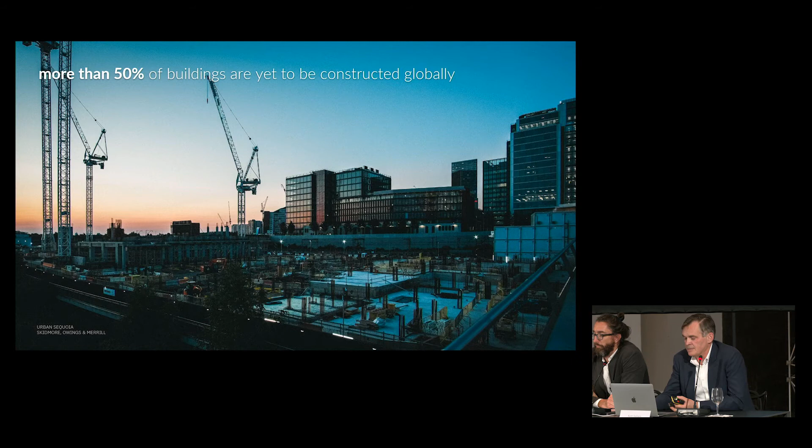So the question is that if we could reimagine our cities in some fashion, and treat them as a series of interconnected ecosystems, where our cities could act more like forests, and help our cities purify, heal, and regenerate, where urban forests could create a new carbon economy, offering a new resource and resilient growth to our planet.

Although a lot of people in the audience might be wondering, how do their organizations even meet the current energy targets? The built environment must do much more than our current ambitions that we're seeing in changing codes and different city aspirations. We can no longer be talking about how we can achieve net zero. All of the statistics illustrate that we're just not going to be able to get there. This is sadly proving to be a clear fact.

We need to be getting our buildings to be carbon negative if we want to make a chance to make any of these changes and the planet be a better place for our future generations.

If we could think more of how an individual building might respond like a tree, where we're able to absorb carbon from the atmosphere rather than emitting it, if we could better leverage our existing technologies or emerging solutions that are out there, could we find a way that we could have a future where our cities are populated with these urban sequoias?

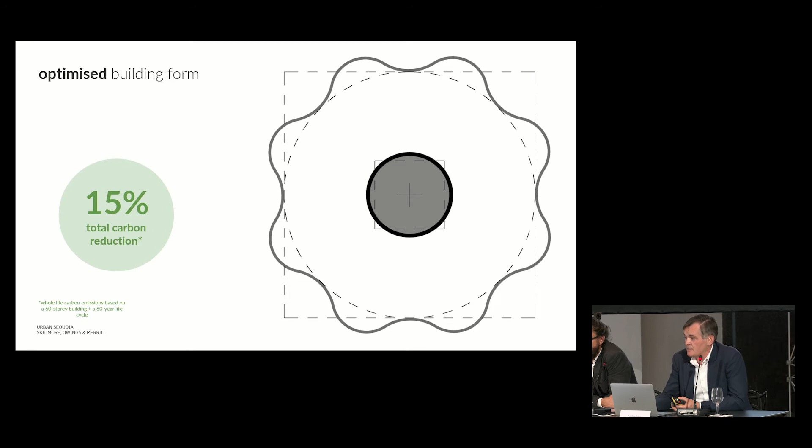Also, by something that's been around since the 1950s, by taking 85% of our building and making it either prefabricated or in modular elements, we could achieve clearly better efficiencies, reduction of waste, and we could limit the movement of both people and goods. This will ultimately allow for less pollution in our cities.

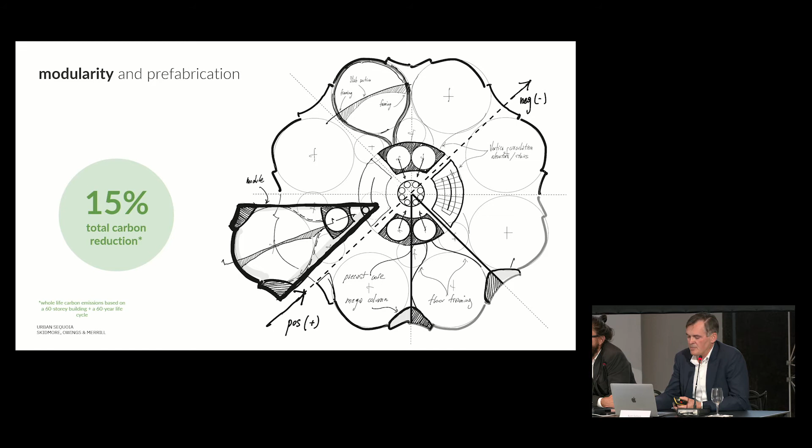And through these very achievable targets, we would again be able to reduce a further 15% of carbon in our high-rise buildings. And if we look at integrated building systems that are both passive and active, the tall building of 60 stories could have up to 30% carbon reductions.

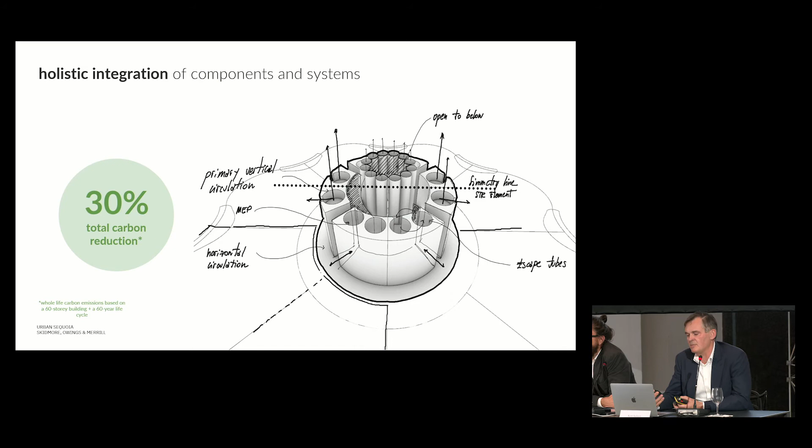That every country in the world that has access to sand, water, and algae would be able to take this and be able, in some of the fastest growing cities and the poorest cities, to make their own building materials on site, and the material could be sequestering carbon. This means we could be delivering solutions that are affordable for everyone and everywhere.

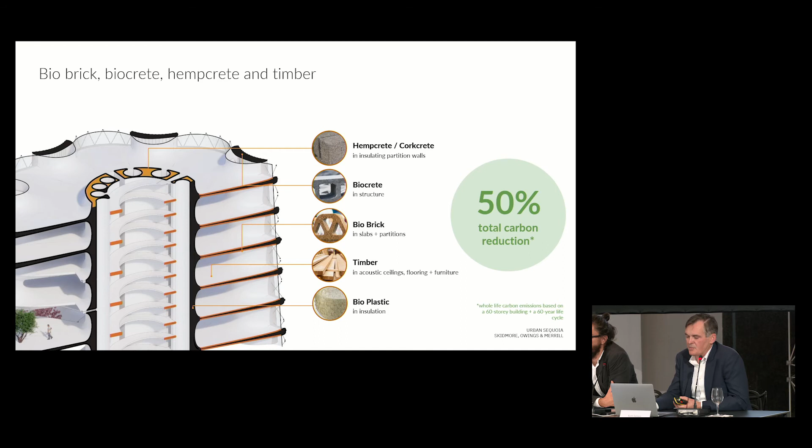Over the last 70 years, we have predominantly relied on only concrete and steel, two of the biggest abusers of embodied carbon. We're finally seeing significant changes in reducing the amount of embodied energy from both steel and concrete. But we really need to look at alternative materials that offer sustainable solutions, such as timber, biobrick, or biocomposites, that can further reduce a building's carbon emissions by another 50%.

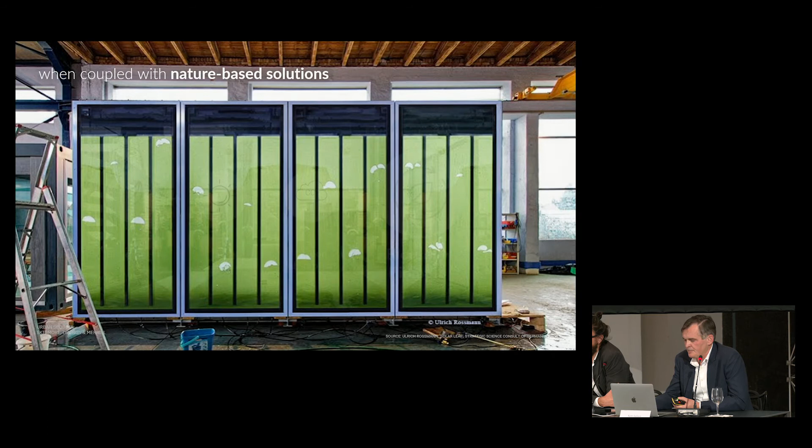When coupled with nature-based solutions, such as algae offerings, this can deliver carbon-negative buildings at scale. This is an algae facade — algae is currently being explored as a source of energy, and its application is already being tested in building components. When algae is incorporated into a building, it can generate energy for its operations and produce biomass as a by-product, reducing whole life carbon emissions by around 25%.

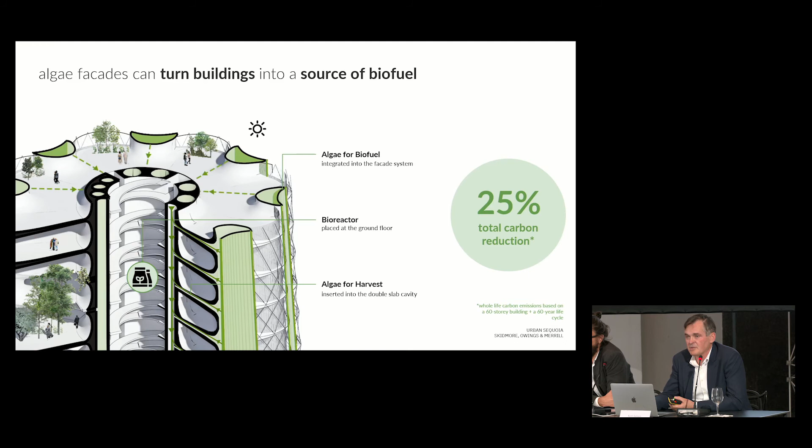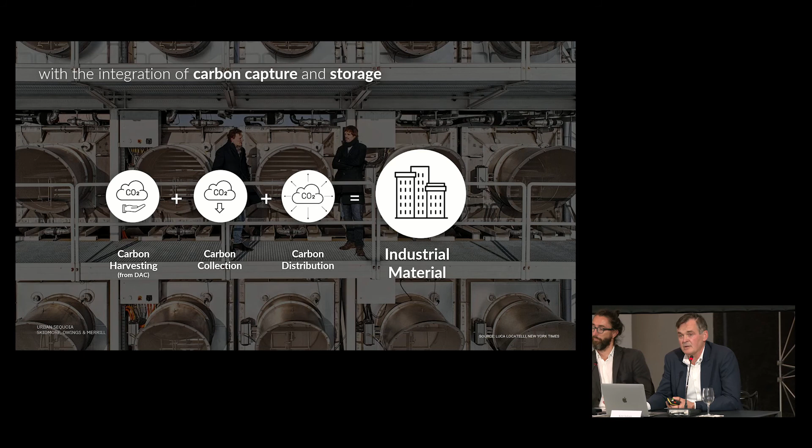When solutions offered through advancements in material science and nature-based sources are combined with technologies from beyond our sector, such as emerging carbon capture technologies currently used in industrial processes, we can bring these to our sector and dramatically accelerate decarbonization of the building industry. With the integration of carbon capture and storage into our buildings, we can achieve another potential reduction in carbon by around 75% in a single tall building.

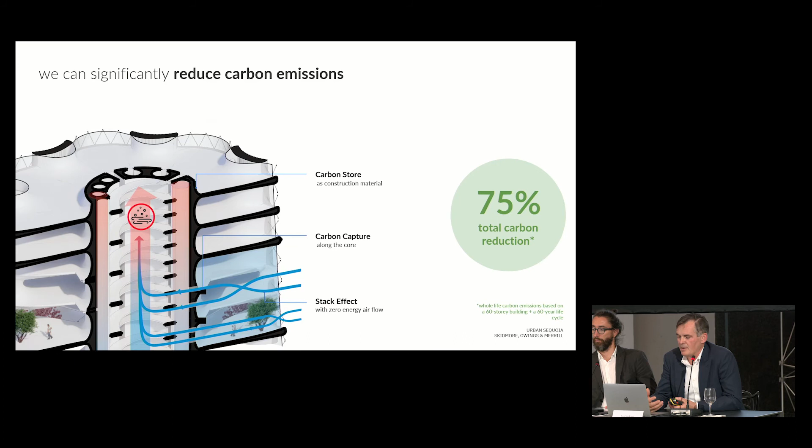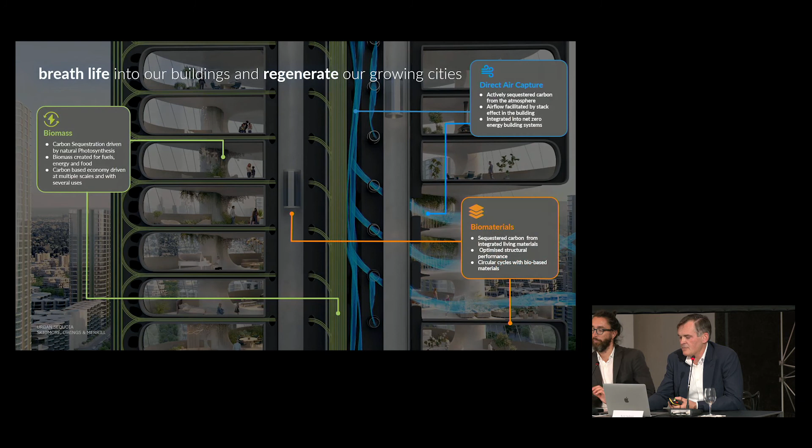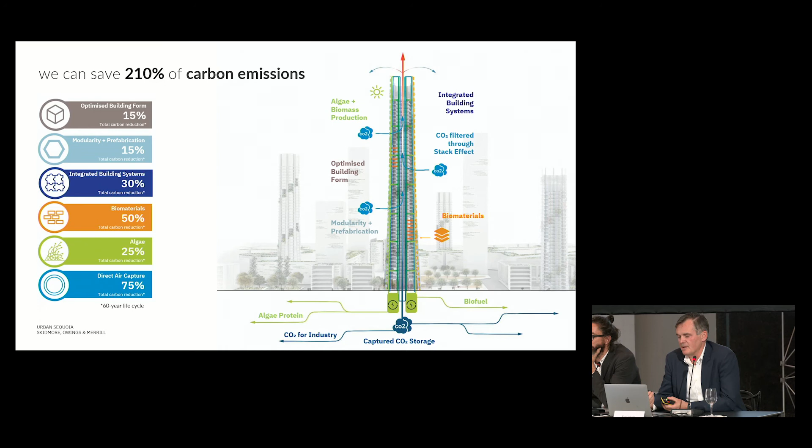Through a collective application of all these solutions and technologies, we can breathe life into our buildings and transform our industry into a catalyst for restoring the health of our planet. In this vision, urban sequoias can collectively contribute to the regeneration of a new carbon economy, where carbon can be traded, bringing a potential new stream of income to our cities as they grow. We should be re-envisioning the city as an ecosystem so that all our cities can be connected and regenerative.

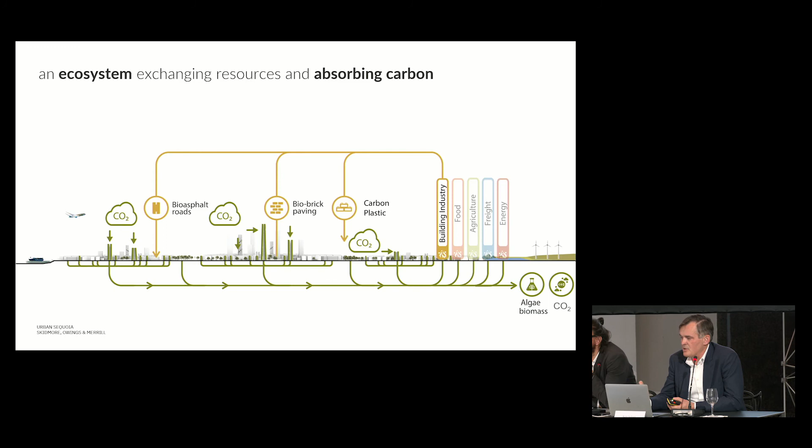Take New York as an example, which has the highest carbon footprint in North America — with its new and very advanced energy laws, it could go beyond net zero into carbon negative and even become a regenerative city. Imagine if we as a construction industry could reverse our current trend, and instead do more good than harm as we expand and grow our cities. It would allow us to populate our cities with urban sequoias and create a network of carbon capture, storage, and exchange.

To date, one of our main answers to carbon reduction has been to plant more trees. But as our population rapidly grows, we will not have time or the land area to possibly meet the required carbon offsets. The challenge ahead of us is going to be incredibly difficult, and it's going to be an immense pressure on all of our shoulders. But we propose to embrace innovation and collaboration within, and most importantly, beyond our sector.

To create a global network of urban sequoia forests, we could save up to 1.6 billion tons of carbon a year — the same as covering the planet with 70 billion trees, equivalent to covering almost all of Europe in trees. So I want to thank all of you today for your time, but I would plead with you that we do beyond our part to save our planet. Thank you.